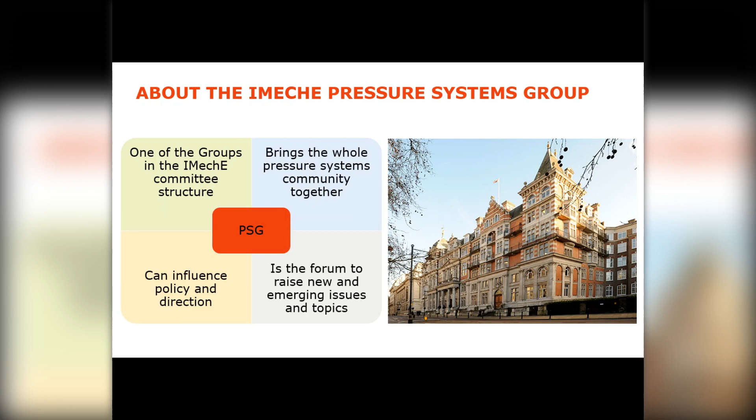That's important because we can influence policy and direction. We are here in the heart of Westminster, so we've got access to government departments, and we can have policy papers and so on. I believe that PSG is the forum where you want to raise new and emerging issues and topics. We've got a fantastic network within the pressure systems community, and we are the place to share information and forge those links between the stakeholders.

Expanding on those a little bit, the groups in the IMechE are here to serve this community of pressure systems engineers by knowledge transfer, and we do that through a program of seminars and webinars like we're doing today.

We've got discussion days on hot topics. We did one on rogue materials and uncertified materials. We've had some fantastic lectures down the years - Stuart Cameron gave the last one. We've got an active LinkedIn group where you can discuss and put questions and suggestions. And with the Strathclyde Pressure Systems courses, we promote those through our network, and we give out a prize every year for eminent pressure systems engineers. That's the kind of activities of us as an IMechE group.

In terms of the pressure systems community, I mentioned various groups we bring together. Academia is represented through Strathclyde mainly. The regulators are there, that's HSE and ONR. Manufacturers - Charles represents the Pressure Vessel Manufacturers Forum. The inspection body - Simon's on the board representing LRQA. Owner operators, big organisations such as INEOS are represented on our board. BSI are there to represent standardisation bodies, and other forums and bodies such as EEMUA and SAFED are represented. So we really are this whole melting pot of everyone who's interested in pressure systems.

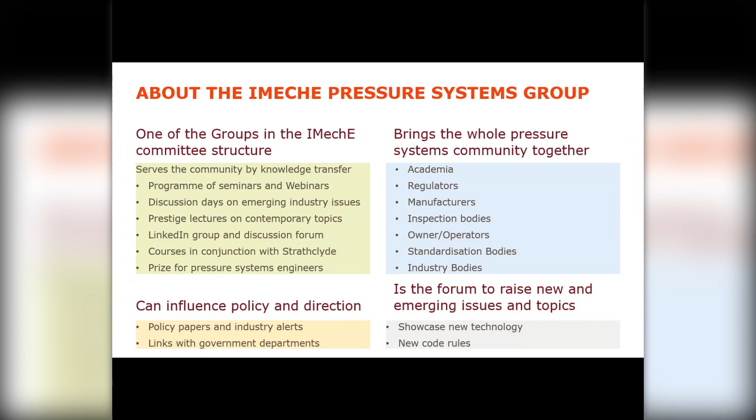Here's an example of some events that we've done. This was the last big one we did in the IMechE - you can see the lecture theatre is pretty packed out. This was the last time we ran the Lifecycle of Pressure Systems event, and it was hugely popular. We'd like to see people turning out in similar numbers, or if not better, in October when we run the next edition of the conference.

We don't just focus on the life cycle, however. Here's a snippet of the kind of events and seminars we've done: failures of pressure systems, changes to regulations, structural integrity, late life care, low temperature, pressure testing, connectors and bolted joints, non-invasive inspection technology, life cycle, quality and competence, additive manufacturing, pressure testing, pressure systems in the digital age, certification, and nuclear pressure systems. And we're coming round to the life cycle of pressure systems again in London in 2023, later on this year.

So you'll see that not all of our events are in London - we don't always hold them at IMechE HQ. We have some in Sheffield, we've had them in Manchester, up in Newcastle, and during COVID we did some online paid-for events as webinars. So if you've got an idea or a suggestion for an event that you'd like to see, or a location - if you want to have an event in your area or locality - please let us know by any of the means I mentioned, LinkedIn etc., and we can organise that.

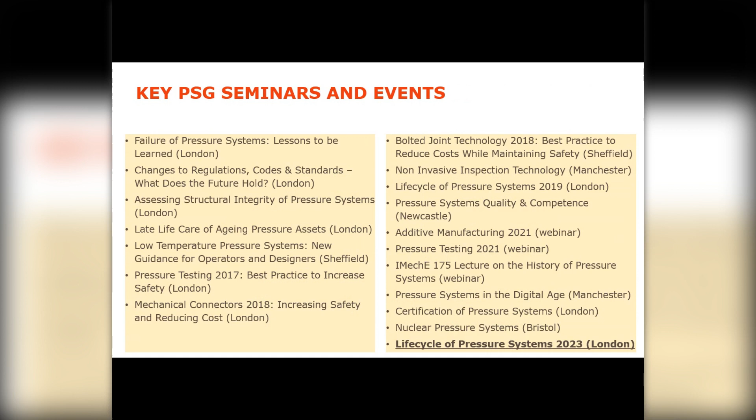That's a kind of whirlwind of what the PSG does and some of our activities that we've been up to. So we'll move now to talking about the actual life cycle of pressure systems and what we mean by that.

If we think of all the activities undertaken during the life of a pressure system, you'd start with the design at the top here, select materials or have materials additively made for you. You then do the fabrication operations - welding, NDT, pressure testing, and so on. Then move to installation and commissioning, go through some commissioning testing, bringing the product into service. On the left-hand side is the operating domain, where you'd be thinking about in-service inspection and operation, then life extension, and finally decommissioning.

They're like the phases running around the life cycle of pressure systems. But throughout all those phases, there's some cross-cutting activities we must think about at all times. We've got applicable regulations, codes and standards, what requirements they specify for each of these different life phases, any quality competence requirements, and things like third-party conformity assessment and inspection are equally important at any phase during the life cycle.

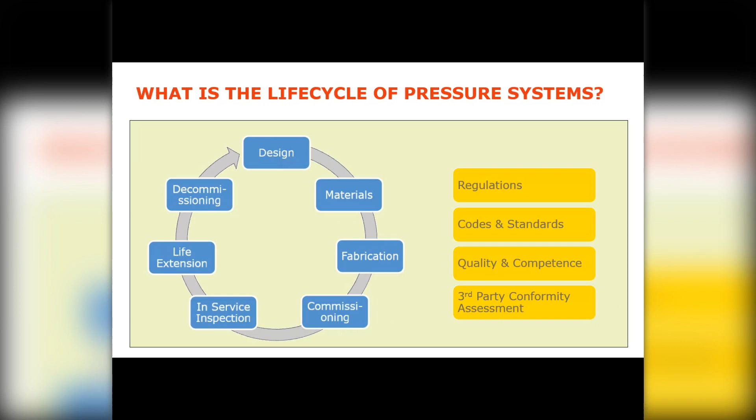So that's all good and interesting - I'm sure you've seen all this kind of stuff before. So why is it important? Why are we presenting a conference on this? For us in PSG, this is important because all these different elements are interlinked in the life cycle, and developments are happening very, very fast, rapidly in all areas. So on the left here, just give some examples.

We're seeing advancements in design, automation in design and AI and all this good stuff. And then additive manufacturing is coming along at a great pace, coupled with advances in non-destructive testing, welding, and codes and standards and so on.

All these areas are in development, but if you take a decision at one stage of the life cycle, it may have a negative or big impact on another stage. So you may have some new technology you want to use, but to think holistically, we need to understand how design decisions impact other areas or phases of the life cycle.

So you take a decision at the design stage, or you choose a material that then could impose different criteria for fabrication, things like tolerances and so on, or access for inspection at later stages during the life cycle.

So the message we're trying to get across is why it's so important that we, as a pressure systems community, take a step back and think about where the new developments are, what the hot topics are, but also where they fit into the overall life cycle of pressure systems, and how decisions taken in one area of the life cycle may impact other stakeholders operating in different phases.

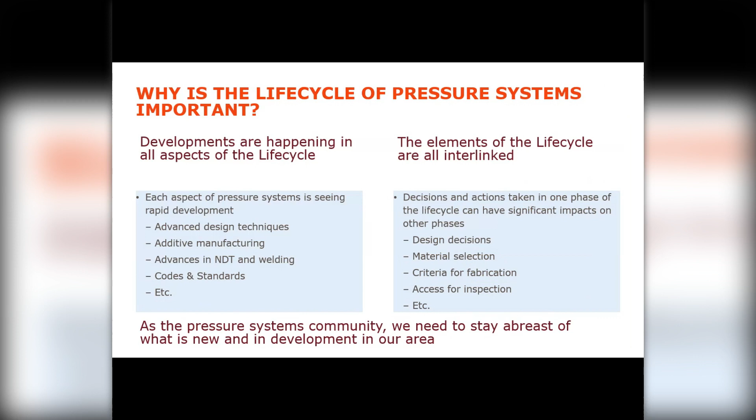But what we're going to do now is give you a taster for the technical talks, of what to expect, or what the new developments are in these various areas of the life cycle. So first up is Simon.

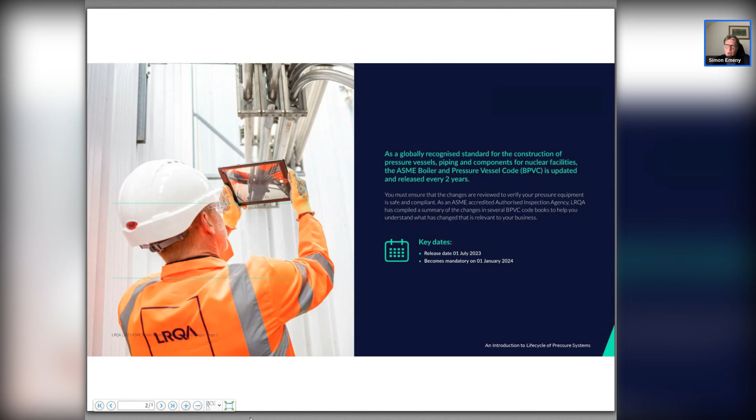So next, Paul will show some examples of the changes that have gone about. Obviously, we'll talk more in detail in the seminar we're running in London, but in essence, I've highlighted two areas that are important for us, whatever type of pressure equipment we're manufacturing.

So the first one is around some changes to the theme of welding procedures, and you can see that in the power boilers section, and in ASME Section 8 Division 1 for unfired fusion welded pressure vessels, as well as where we'd expect changes, which is in ASME 9, the welder and welding section. There's also been a change to base metal and its relationship as an essential variable.

So we've got some changes coming up that are quite important for anybody using the ASME code. Now, some people will use the ASME code as it's published. Others will still be using the version that was in place when they signed their contract.

And others will be looking at how they're going to use ASME going forwards. As part of the session we're putting on in London, there will be the opportunity to go through those different scenarios. Other changes in ASME coming up around Section 2, the materials section, are widely used, not just for one particular part of the ASME code. You can see there are a significant number of material specifications that have been changed, either small or more significant updates. More detail can come, but it'll be quite interesting whether you're into ferrous or non-ferrous materials. We'll have a look at the next one, Paul.

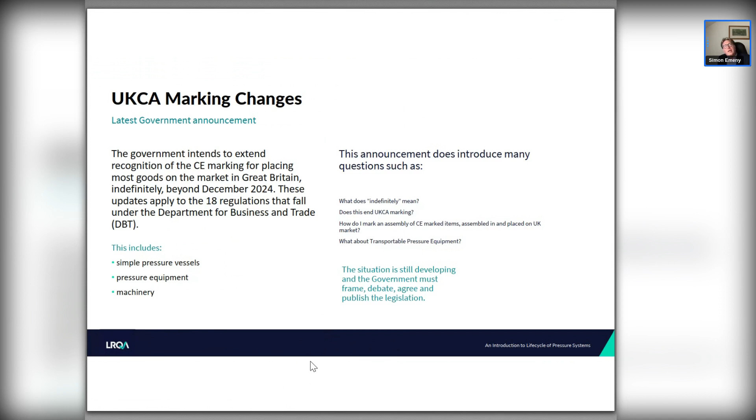And so that is a nice little segue, Paul, I think, to move across back to you and then across to Charles for a discussion about manufacturers.

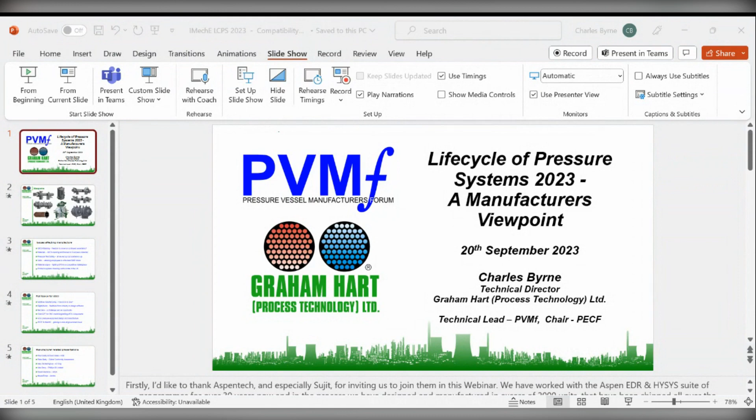Ooh, no, sorry. Went so well in practice. Window. Yeah. Okay, so that should be there now for people to see. Yeah, got that. Thanks. Right. Okay, no problem.

Charles Byrne, Technical Director at Graham Hart. We design and manufacture heat transfer, high integrity pressure equipment, and have been doing so for 50 years. I also serve as a technical lead on the Pressure Vessel Manufacturers Forum and chair of the Pressure Equipment Consultation Forum, a group of stakeholders from industry with a vested interest in regulation and legislation relating to pressure equipment.

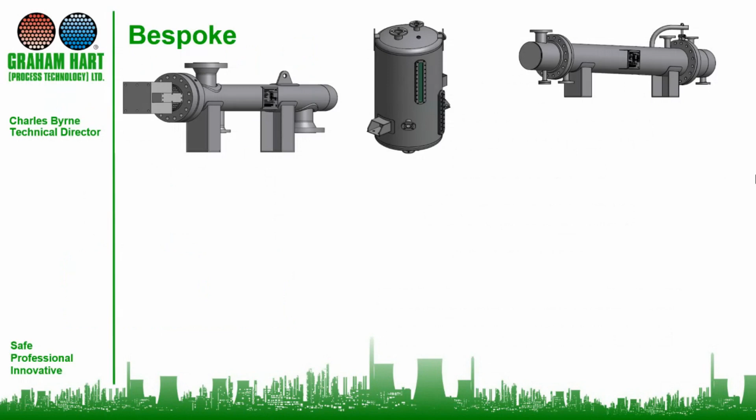Just to give some background on where we come from: at the company where I work as technical director, we get involved in all sorts of pressure equipment - electric heat exchangers, reactor vessels, heat exchangers, spare bundles, separator vessels, and in some instances very high pressure and high temperature shell and tube heat exchangers and vessels upwards of 550 bar and 1200 degrees C. So with 30 years of experience, there's a lot we've been exposed to in terms of mechanical design, codes, legislation, regulations, and changes.

So what are the current issues affecting manufacture that would be commonplace to a number of different manufacturers? Obviously, the main topic would be UKCA marking - whether this now represents freedom for us as manufacturers in the industry to move, or whether it's continued uncertainty. That depends on who you're asking and their view of their products, how much exporting they do, or how insular their thoughts are on the UKCA market. But UKCA marking at the moment is certainly one major area of uncertainty, and it is an issue affecting manufacture.

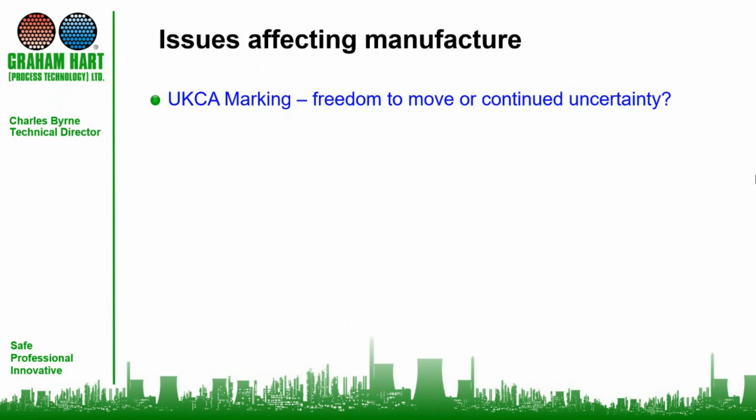Likewise, materials. 95% of the materials we make for our pressure vessels and heat exchangers come from European suppliers. Without a proper system of recognition in place at this moment, it would prove impossible to bring European materials from European manufacturers straight into the UK, because the legislation as written requires those suppliers to have a quality system approved by a competent body established in the UK. There's not enough commercial interest to generate a desire on the part of material manufacturers to become certified again, not only to a European competent body but to a UK competent body as well. It's a lively and ongoing debate.

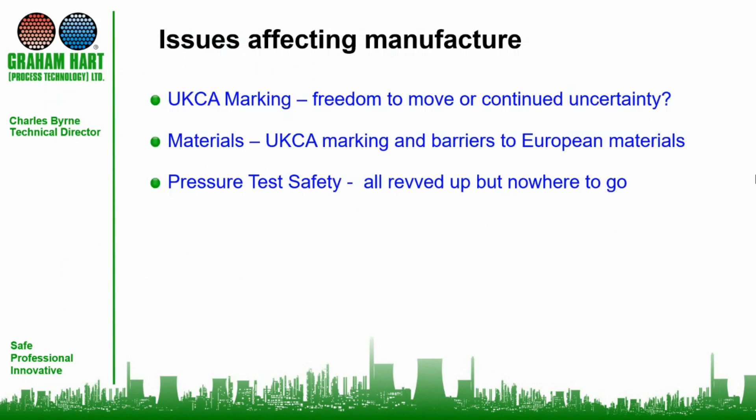Pressure test safety - all revved up but nowhere to go. Responding to the needs of industry in 2017, we devised a system and guidance with EEMUA 158 on pressure test safety. It's now possible to do e-learning, and also bolted joint courses. The main problem at this moment is that even if people complete these courses, there's still no means for them to have their competences assessed and certified. So we've rather hit a roadblock, and we need to reopen that discussion to find out how we take people from being educated and trained into a position where they can actively use their competencies.

One of the major things affecting our industry is the ability to retain people in a nuclear and SMR future, where we have a large divergence of previous and loyal employees all moving towards those industries in greater, and worrying, numbers. We need to look at that as manufacturers and discuss how we actually entice and retain people to carry on manufacturing in the pressure systems arena.

Material origins - as we live in a very competitive marketplace, we continuously hear stories of material suppliers and distributors facing a difficult choice: go out of business, or start importing materials and overstamping them, trying to claim they've come from a different point of origin. That's an ongoing fight that means we have to be ever vigilant and work with the notified and approved bodies to take care of that. And then we have a situation where some product suppliers are simply choosing not to locate in the UK.

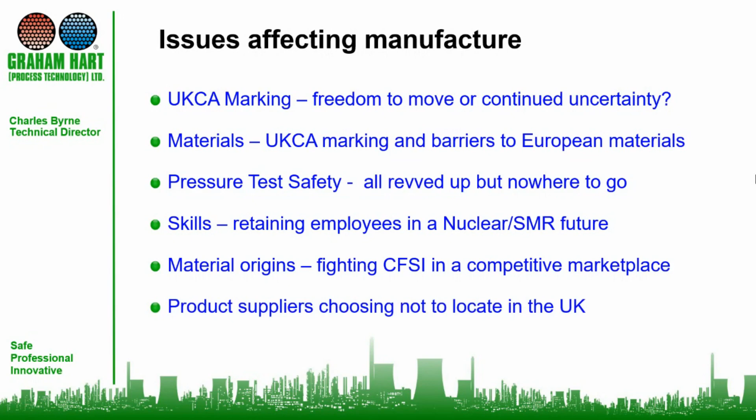So we have end users that are convinced to use certain products like gaskets, and then we find that those gasket manufacturers are not located in the UK, and trying to deal with them in Europe is a very, very big problem.

The hot topics for 2023: additive manufacturing. How soon is now? How soon are we going to start seeing additively manufactured components actually being used in design? A very hot topic. Now that this has been introduced into some of the codes, these things are developing at an incredibly fast rate.

Digital twins - when are we going to start seeing the feedback from industry back into the design software and seeing the benefits, so we can start thinking differently about how we design our pressure vessels and heat exchangers?

Net zero - a challenge and an opportunity for our industry, and we wait to see just how much of that is going to actually come into UK manufacture, and how we adapt the existing equipment we've made to face those new challenges from CCUS and hydrogen.

An interesting topic that's just been brought online is the use of ChatGPT for CNC machining and drilling of pressure vessel components - it's a hot topic among manufacturers. And AI, artificial intelligence, in pressure equipment design and manufacture - a topic which I'm hoping to touch on far more when we have our seminar.

Finally, the PECF and the IMechE - as Paul has alluded to, the IMechE Pressure Systems Group has the ability to influence policy and direction, and we're looking for that to be the case in terms of UKCA marking and any other topical matter which we think is going to affect the competitiveness of manufacturers in the UK.

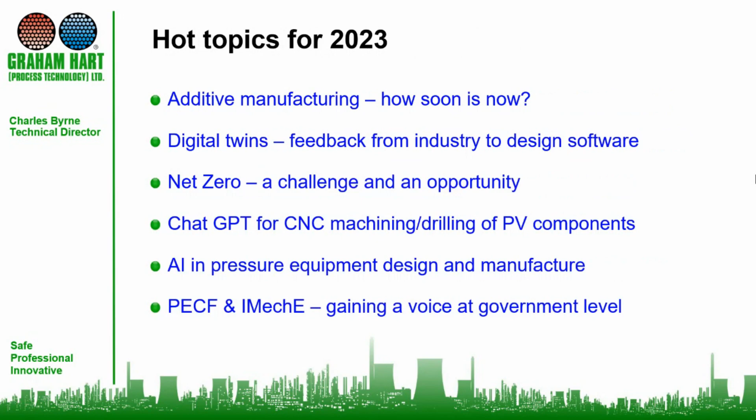Final slide - taking a look at some of the other presentations which nonetheless have related manufacturing content. Paul Grady and David Glass from the HSE will be looking at regulation now and in the future for manufacturers and operators.

They'll be looking at regulation across the full life cycle and wider regulations to reflect ongoing developments for net zero. How will that future knowledge be shared and cascaded, and what will be the HSE strategy to actually enable industry to innovate, but do it in a safe manner?

Peter Batty will be talking to us about global conformity assessment, and talking about some instances and examples he has where equipment, although designed and manufactured correctly, has not been considered from a global conformity point of view, and then creates problems at the point of installation and use.

Alex Zakisharava is going to produce a really good presentation on a full life cycle review of how the design phase of a pressure system life cycle can impact things. He's going to look at the impact of design decisions in terms of cost of procurement, the ease of fabrication, installation and commissioning, and then the subsequent operation and maintenance.

He'll look at examples of poor design or design omissions leading to issues later in the life cycle. Alex will also highlight some good and bad practices in the design phase and how to get rid of them.

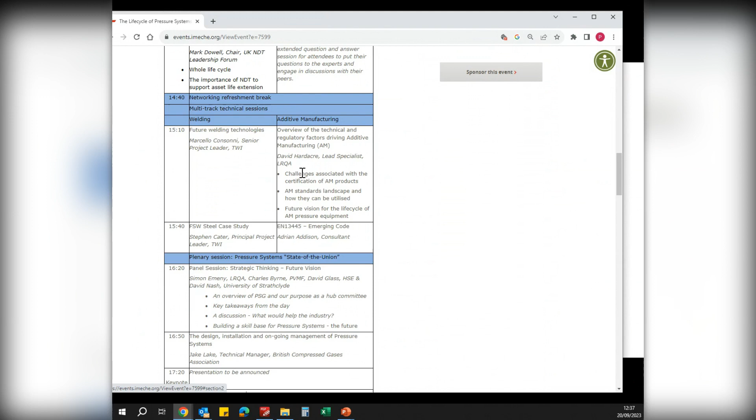After the break, we'll have a welding session hosted by TWI looking at future activities, and then additive manufacturing - again this is in parallel, so you can choose which one to go to. David Hardacre's been mentioned - he's got a lot of material to cover on what's new. Then Adrian will look at the emerging code and what's being codified in EN 13445.

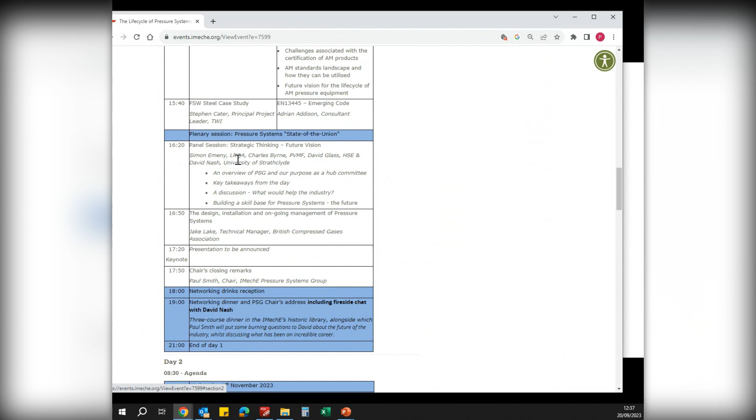We'll come back after a break to the plenary that I mentioned, and that's your chance to really get the latest or put your views across on where we should go as a pressure systems community. Jake will round off the day with another case study. We do actually have a spare slot here as well.

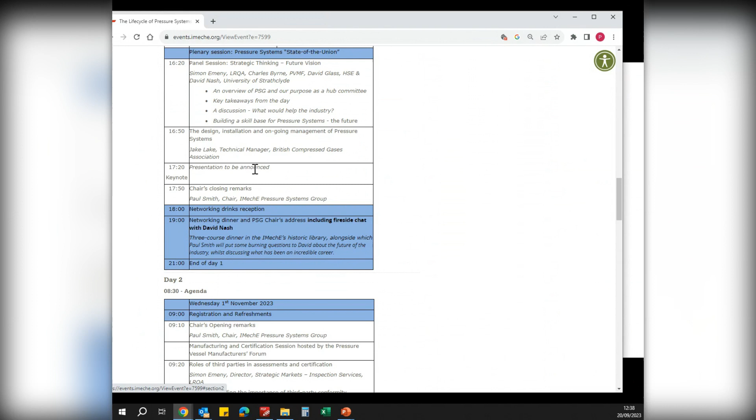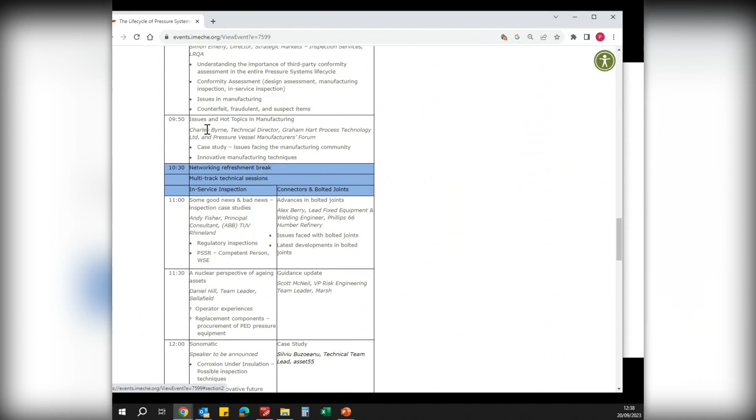The dinner, we'll sit alongside David Nash and hear about some highlights of his amazing career. Then in the morning, Charles and Simon will kick us off with a manufacturing and certification session. Simon's going to talk about third-party conformity assessment, and Charles will talk about the hot topics in the manufacturing community.

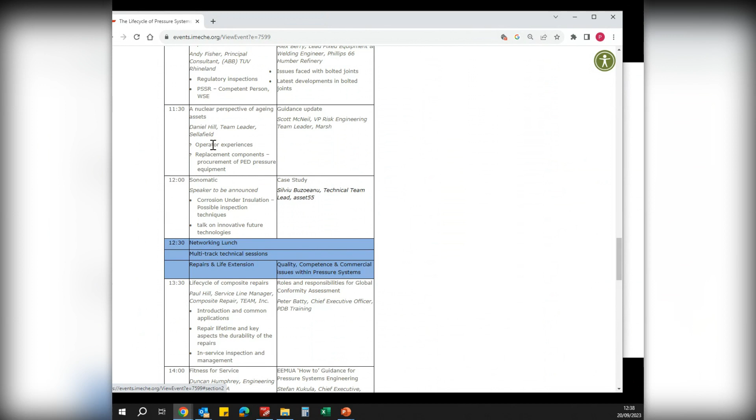Moving now to in-service inspection, we're in the operation phase of the life cycle. Andy will give us a talk from an inspector's viewpoint. Daniel Hill will talk about Sellafield experiences, how the nuclear domain treats in-service inspection and aging assets. And Sonomatic are going to give a case study as well.

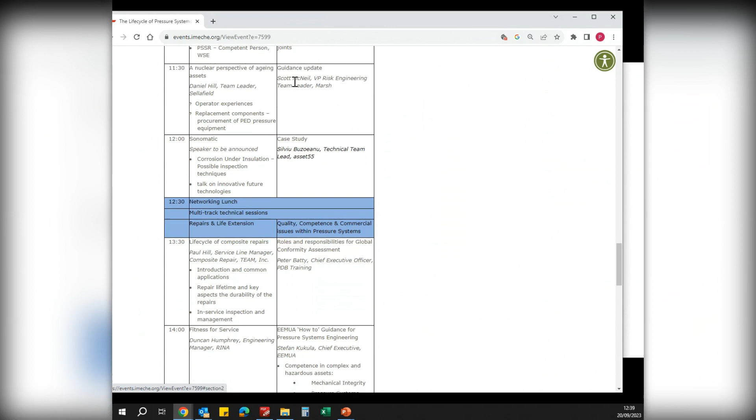Connectors on the other parallel stream. Alex Berry did an excellent job the last time he presented for us, and I'm really looking forward to hearing him present this time. Scott will give us an update on the connectors guidance that was issued, and Silviu will talk through a case study from Asset 55.

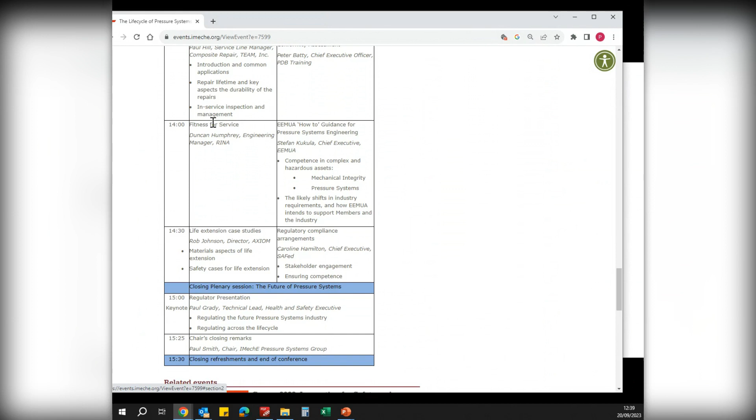You can see how much content there is in this program, it really is fantastic. Paul Hill from TEAM will talk about repairs and life extension. Then we've got Duncan from RINA talking about fitness for service. And Rob Johnson will talk about safety cases for life extension.

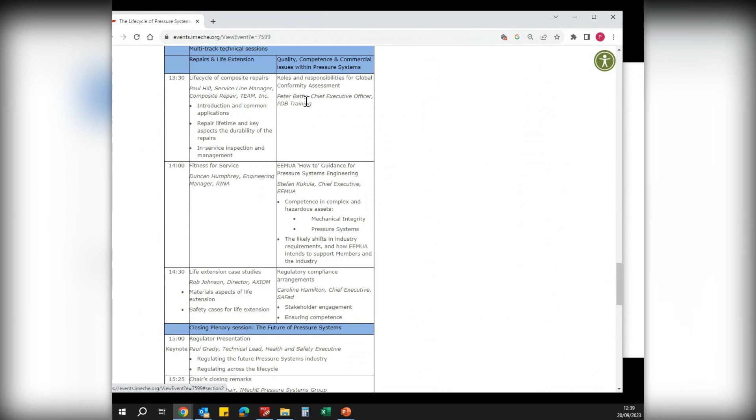On the other parallel stream in the quality side, Peter Batty has been a friend of PSG for many years now, and he'll talk about global conformity assessment. Stefan is the chief executive of EEMUA, coming along to present at our conference, and he's going to talk about how to. And also Caroline Hamilton, who's the chief executive of SAFED. We've really got some big hitters in industry organising the conference around their thoughts and what's new in the life cycle. Then finally, Paul Grady will provide a regulator kind of conclusion.

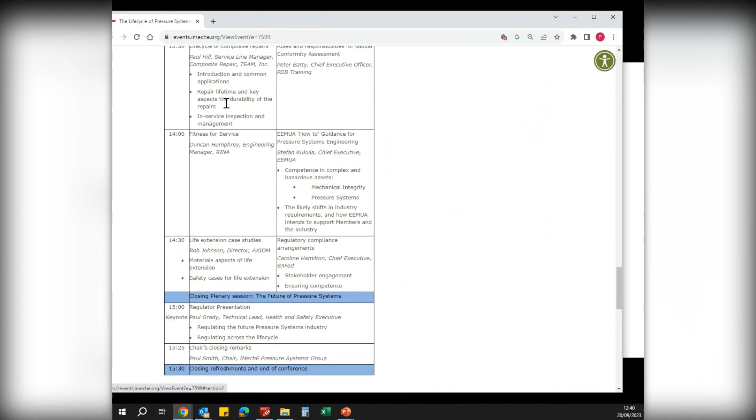We've got regulators at the beginning and the end, they kind of bookend the conference. It's going to be a really fantastic 2 days, I'm certainly looking forward to it. Please go ahead and check out the program on the website there, it's got all the information you'll need.